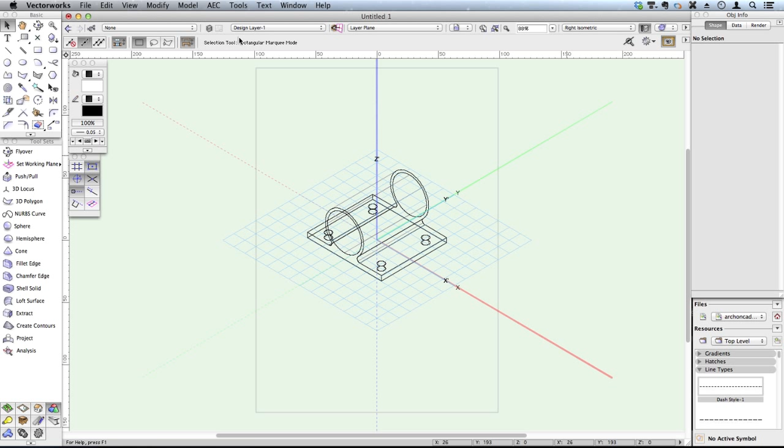Well, I've actually done an online test once where drawing something like this took me about 27 minutes. I needed to get all the sizes, create all my guidelines and so on. Using this method, the 3D model, which will then generate drawings for you, took me about 7 minutes. To me, it's stunningly quick to build the 3D model first. So let me show you how quick it could be.

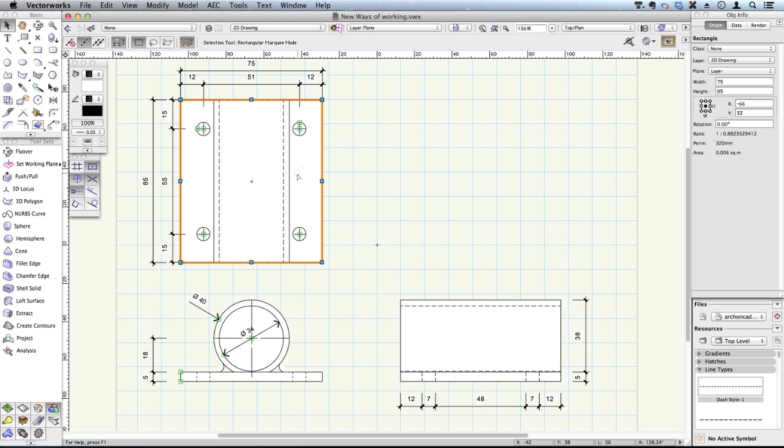This is a two-dimensional drawing of a bracket, and I've drawn it using the good skills of rectangles, circles, and things like that. And so it's a relatively quick way to draw a 2D drawing. But it's not the fastest way to create these drawings. The fastest way to create that object is to model it in 3D.

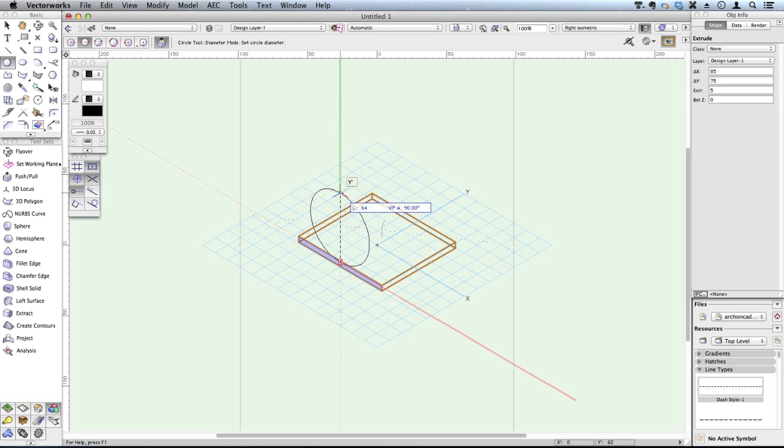I'm going to start with my rectangle tool, and then I'm going to use my instant push-pull to create the extrusion. If I go to my circle tool and I choose automatic working planes, I can very quickly make that circle, make that into a cylinder, and then create the next part. Using a keyboard shortcut, I've now cut a hole through that object.

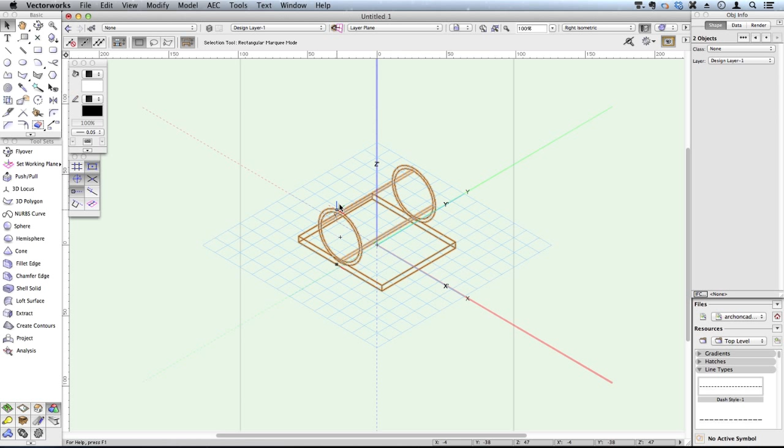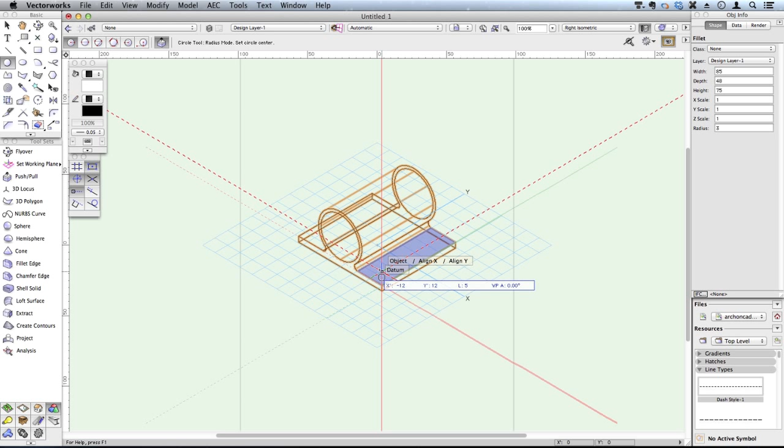Let's add those together and radius the edges. I'm going to fillet that edge and that edge. I just need to put a couple of circles in for the bolt holes. That's the start. There's my hole there, and I can extrude that through.

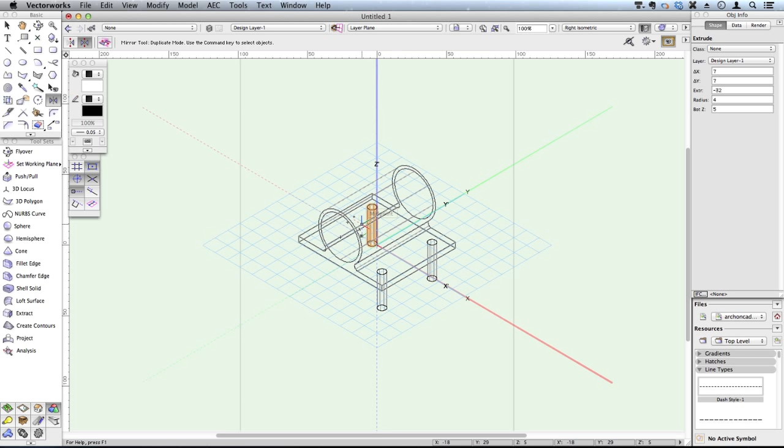I can then mirror that object using my mirror tool and mirror it back that way again. So I've now got the 4 bolt holes. I've now got everything selected. I can turn those cylinders into holes.

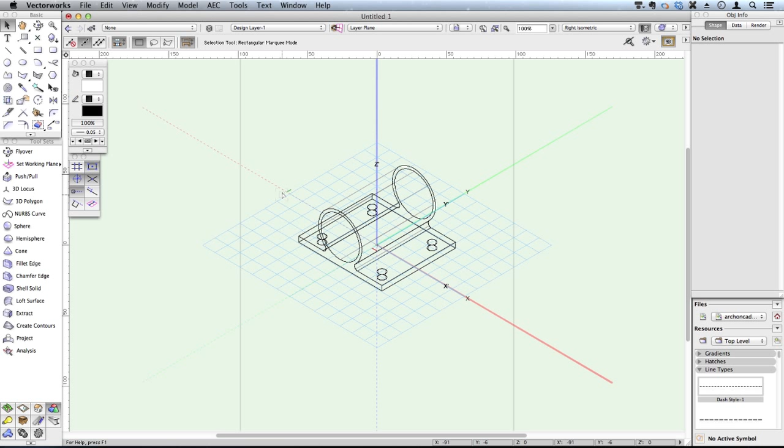So now I've got the whole 3D object used to create the other drawing. In fact, it's quicker to model that in 3D than it is to draw just the plan view of that 2D drawing. Now I can create multiple viewports, and I've created my drawing. To me, that is an extremely quick way to create the drawing.